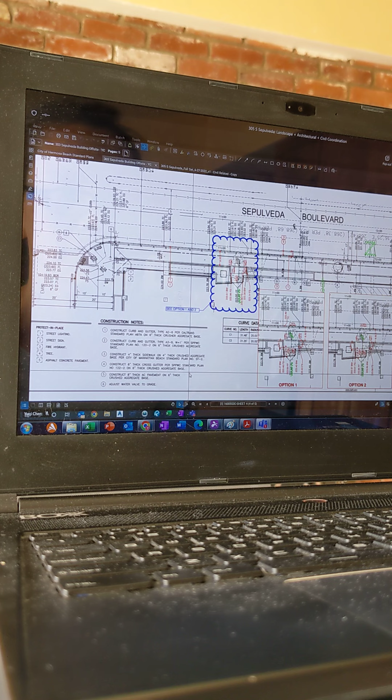So what Yuki is showing is the area off of Sepulveda, which is our main entrance. Previously, the sidewalk was sloping towards the curb, but everything from the property line was sloping towards the building, towards the door, and we had a trench drain. Maybe Yuki, you can show what the initial grading concept was and where we want to see if we can make a revision. Yeah.

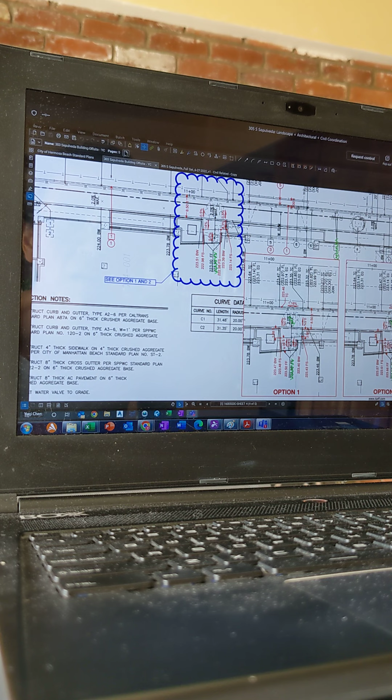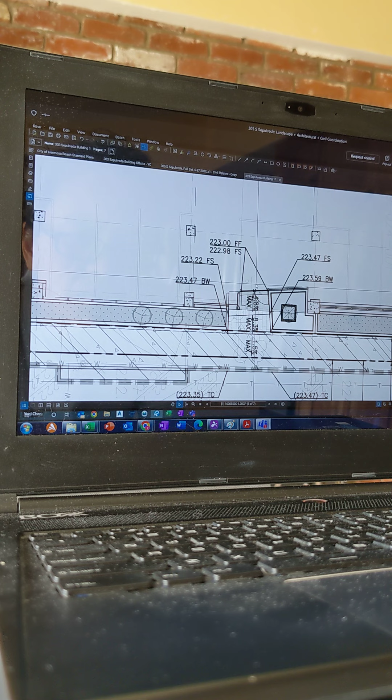So originally we are proposing to have the sidewalk and then with a ramp that goes to the trench drain, which is this one here, and then go into the building entrance, the 2%. And because the elevation is way lower than the street elevations, that has to go towards the building. But the issue is that there will probably be some drainage going to the building, which is not preferable.

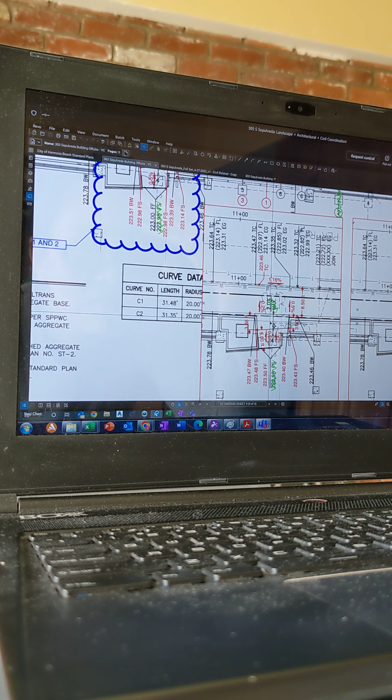Then we are proposing to have two options that can help to mitigate the issues by raising the building pad to allow the water to flow out to the street with a minimum slope. So here are option 1 and option 2. With option 1, where we are raising the building pad, the main entrance, about 6 inches, then we can have a very minimum slope to drain the water out of the building side and to the street.

And then option 2, if we raise it 8 inches, then we have more flexibility to meet the street requirements, which is the sidewalk can go over 1%. With everything going to be drained and caught here on the trench drain as well as going to the street. So these are the two options that we propose to help mitigate the drainage issues.

I'm not sure we can raise it at all based on the height limit. So if it's not the entire pad, Kara, could it just be a transition at the door like we have done on some of our other projects together? The reason here, I think it's option 2 that will be approved by the city and Caltrans, given they want a minimum of 1.5 to 1.8%. So for option 1, we'd have to fight harder on presenting our case.

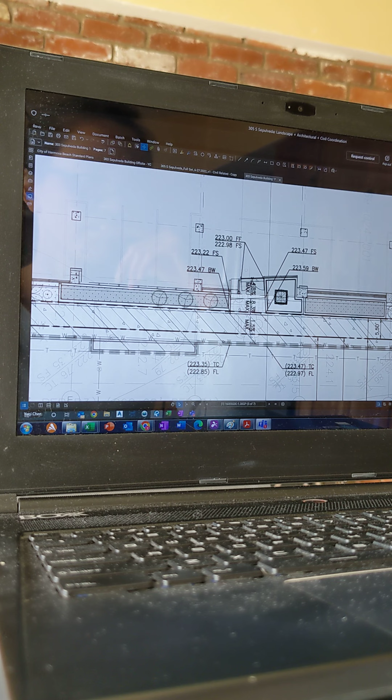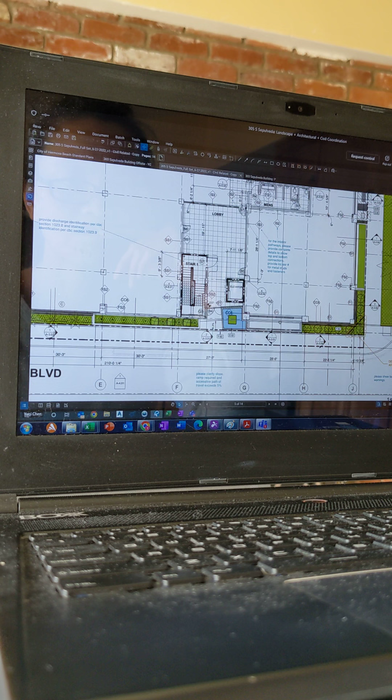I think the plans on the architectural, and Yuki, you have that right from the comments. Yeah. It's showing 223, and that has the 8.3%. And so that's the comment from the city as well: please clarify slope ramp required. And I see we have the elevator there. So could we catch up to the grade just at the edge of the elevator on the west side? What's the grid line? At the westerly edge of the elevator to grid line 2. You would probably need a flatter 2% slope as well, right, Karen?

Kate, do you have the model open by chance? I'm in the process of opening it to look at it. But I thought we had 2% at the door, 8.3%, which yes, still does not work with the required handrails and then the sidewalk. Yeah. And it looks like we're about 3 inches below our height limit currently. So we would be maxing it out to 8 inches, right? Because is it 223.67, Yuki, in option 2?

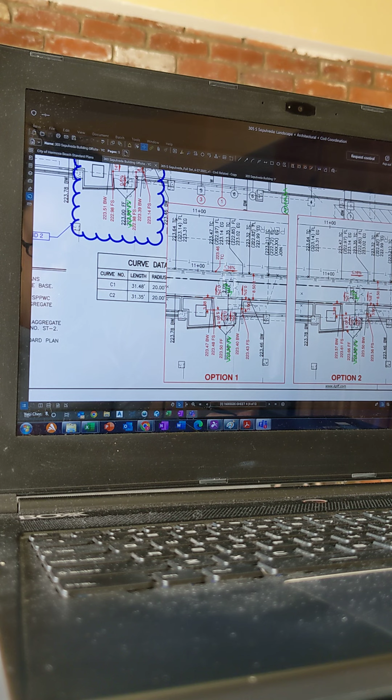Yuki, can we zoom into the south side on the alley? Because right now it looks like we have a 9.8% ramp from the property line to the wall. The loading you're talking about is in the alley, correct? Yeah, it's down farther on that plan.

So the alley drawings that you were looking at on Boundary Place? Yes, so that's, and I don't exactly remember what happened here. I think they want this loading, but someone, like a neighbor or someone, didn't want it. So what the city asked us to do is to wall it off, but make it so that if we do want to make it a legitimate loading zone in the future, they can demo that wall and it can be a truck turnaround or a loading zone. So that's why there is a wall there at the 223.

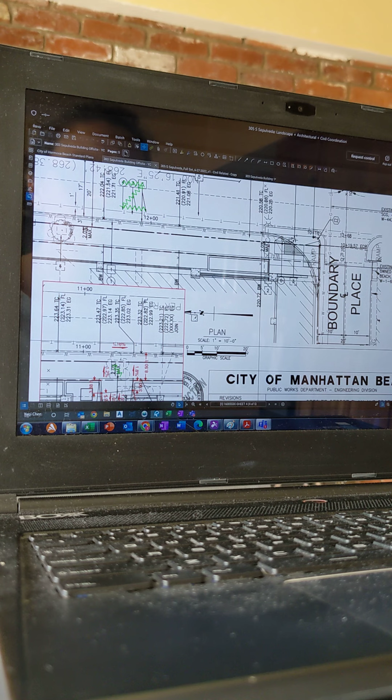Yeah, that's a 9.8% ramp. That's so random. 9.8%. Yuki, you looked into the grading in this area, right? Do you mind pulling that up? Maybe splitting the screen. And then other than those two areas, I don't think it will affect anything else, right? No, the other areas that we have, and we can look at it. So that's the loading. Yes, the elevation at the alley. Maybe even pulling up the survey would be helpful.

Well, it's that grid line 8 or that property line. Yeah. So we were making the adjustments at the property line, so maybe we should open up the survey, Yuki, here. I guess I'm also thinking about if this whole slab raises, does that raise those planters on the west yard? Like, does it raise the whole structural slab? We can look into that.

I believe there's another thing Tim mentioned to me just a couple of days ago. On the west side, we need to provide a fire access route. Is that right? And he indicated that was coming from a conversation with Bennett Design Group. So one of the correction items was to provide a fire access walk around. Okay. So not really a route per se. Okay. But Yanni, correct me if I'm wrong, but I believe it was a 3-foot wide walk around. That's right.

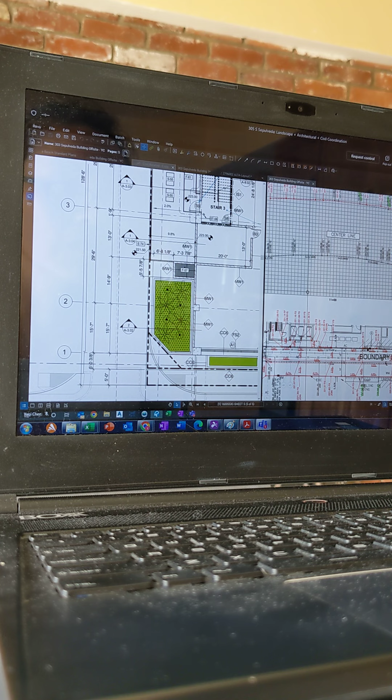And towards the north end of that, the existing grade looks like it really drops down. So from grade to top of wall, it looks like it's 8 or 9 feet. Are you looking at the western side? Yeah, the west side, at the north end of the west side, right by the transformer yard. I think that wall is like 8 or 9 feet. Could you go to the survey, Yuki? Maybe unsplit the screen.

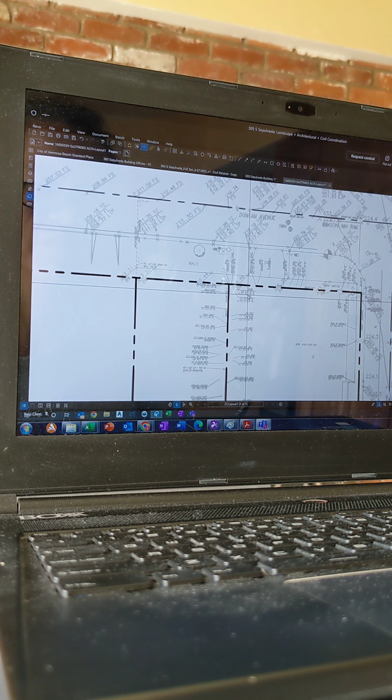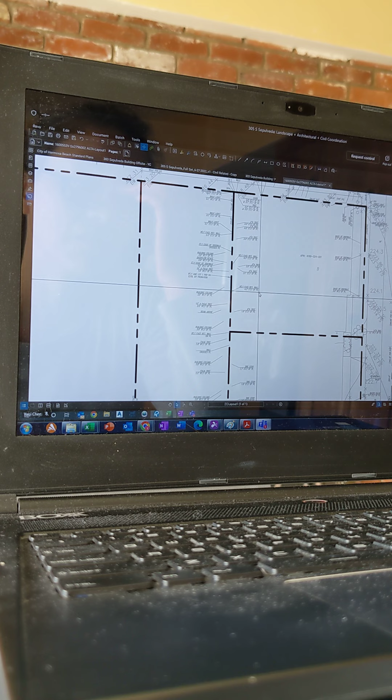That's the west side. That's the north. It's further. It's okay. Plan down. And I think over to the left more. So if you zoom out completely. This one doesn't have all that information. Yeah, so one of the things that we need is to get our survey team out to get the elevation along this path here. Requesting control.

Well, okay, do you have our set open? It looks like you might. Can you go to page 42 of our set? Open up the full plan check comment set.

Hold on, I'm doing that. Or I can share my screen. Would you prefer I do that? Sure. I just wanted to show you. This is all about the west side.

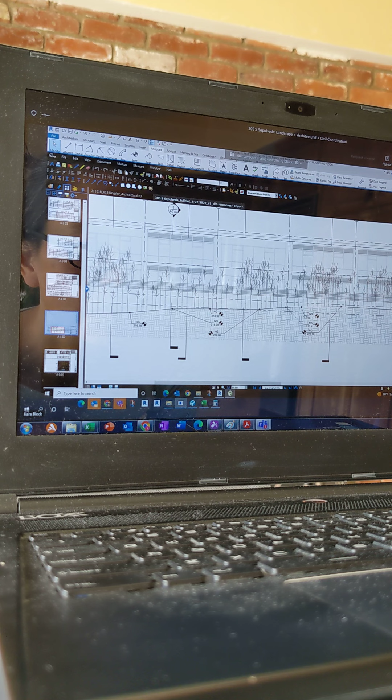West wall elevation, yeah. So we have this west wall elevation, and I'm not certain how we got to these. I was assuming it was that we worked out something with you guys for this natural grade. But I guess if you don't have that on your survey, I don't anymore. I'm not confident on how we got this.

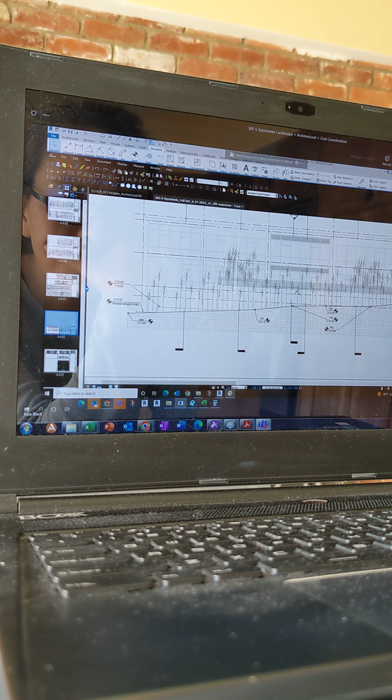Right now, this is the transformer pad area. I don't know if this is here, but then this is that westerly planter. So it's like really tall at this end. It gets less tall over at the south end. Let me see. I know we did the 3201. Not sure if they got any elevations at that time.

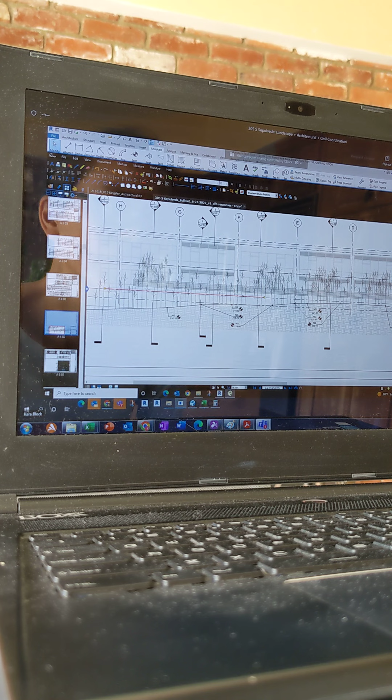Yeah, for some reason I thought you guys did do some there, but it was difficult because of all the vegetation. That said, the reason why I started even looking at this is because right now the floor to floor is 12 feet. And if we are talking about moving this up 6 to 8 inches, that will also potentially affect this planter back here. But what is this planter? I don't exactly know what that planter is anymore.

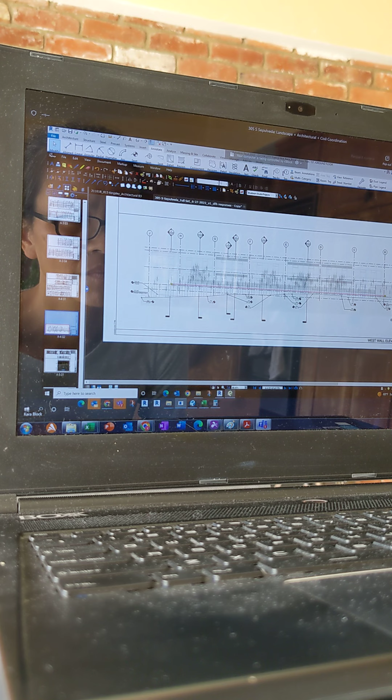So I guess we probably need to change it, right? Because do we have a use for Epic? And given the challenges that we experienced on 330, I'd rather not use them because if Mary's still there, she was not easy to work with. But I want to get the opinions of KPFF and Bennett Design on that one.

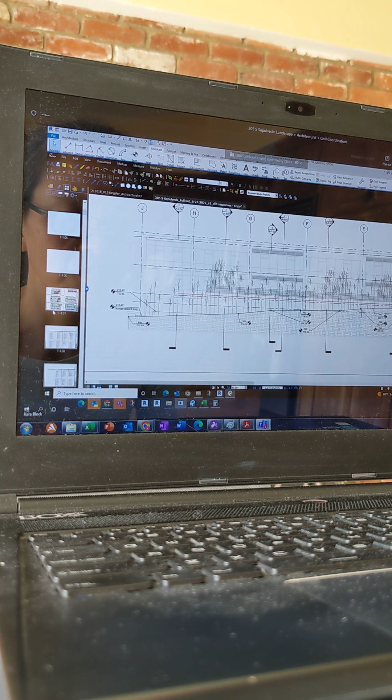But also on our end, we need to look to see if there's any height limit restrictions of things in the side yard. I hope not, because everything from this line down is in the garage level. So this is our electrical room and our fan room and stuff like that. So I don't think we can lower it at all. Lower what? This wall, this top of wall. But we are not looking to lower it, right? Well, no, but I wanted to make sure there's no height limit of walls in the side yards, because this is technically a side yard at this point, not building. Okay.

So from our perspective, it doesn't matter to us whether it's Epic or not, because we are changing the mechanism of the stormwater treatment system. We are utilizing a dry well, and what that western planter is counting towards is the green space in our calculations. But that is it. That's our perspective. So I'd leave it to Bennett Design Group on whether they want to repurpose that planter and use it as a normal planter space rather than using Epic equipment in it.

I think when we did our last round of plans, the assumption was that it was no longer an Epic planter, but we can revisit it again. Right now, we just have low grasses in there. The bamboo part, though, Kara, is taller, right? It's where the bamboo is. I think. Yeah, that bamboo is in natural grade. I don't know how deep, but there's a space. Looks like it's 1.5 feet between the wall of the building and the property line. So that's where the bamboo is going to be going in.

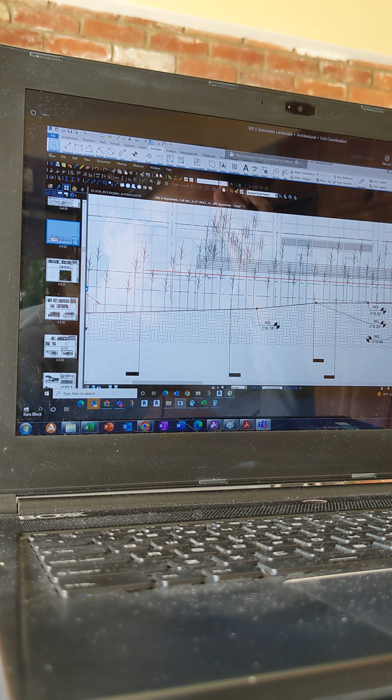Oh, so no. Sorry, not that skinny area next to the property line. I'm talking about within what used to be the Epic planting area, you had individual rectangular planters. Those are taller, right? That's more like top of wall, 48 inches above structural slab. It's taller. I don't know about 48 inches. Okay. So right now you can see them. They're right here. But that is taller. Okay. It is taller. I don't know the actual dimension.

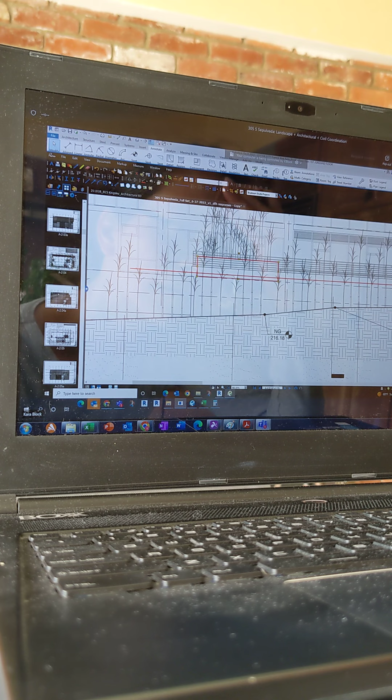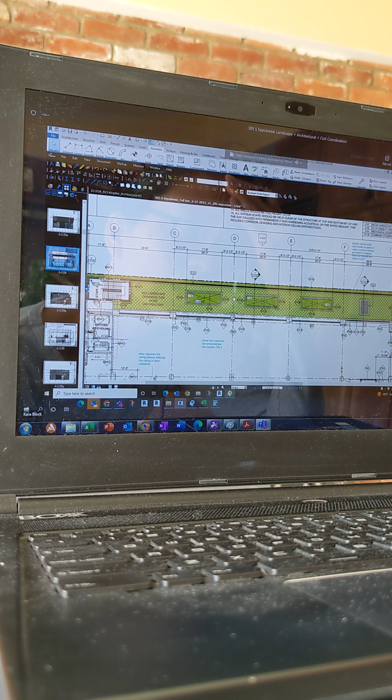So I guess for Yanni and Todd, it's up to you what you want to do with the rest of this planter and what you are able to plant. But now that it's not Epic, we will have to slope to drain, so we'll have to have a built-up topping slab, and that we will have to figure out together. Because it's going to get really shallow up here, and I'm assuming the drain will be somewhere here. So soil depth to be determined. We will have to look at that together. Because this is on top of the garage, right? Yes.

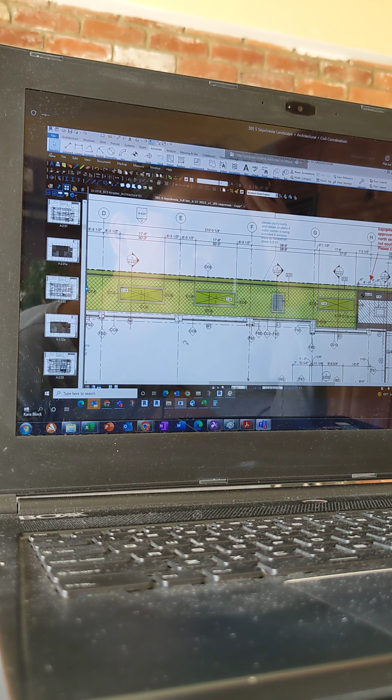So that's the other thing. I'm looking at this drain and this planter. I'm not sure it can happen here because you can't have any drains in this electrical room, but I believe they can be in any of these other rooms. So we should look at that too. That's, I guess, for Yanni and us.

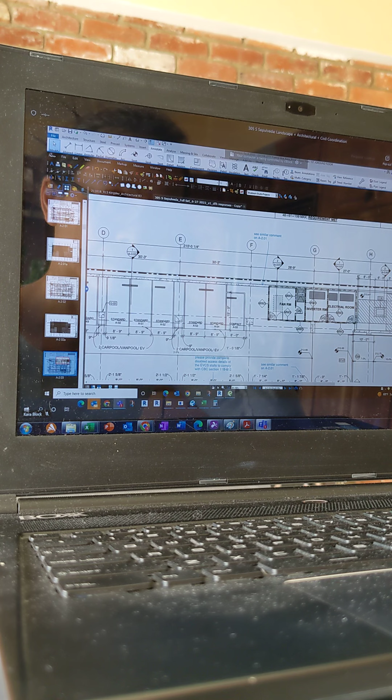It's good. So just looking at summarizing our coordination, the finished floor at the main entrance. I believe we have just the main entrance off of Sepulveda Boulevard that would be impacted, and then the loading on the south side. The stairs, elevation at the stairs is flexible, right? Because you'd be catching the grade at whatever you have at the alley.

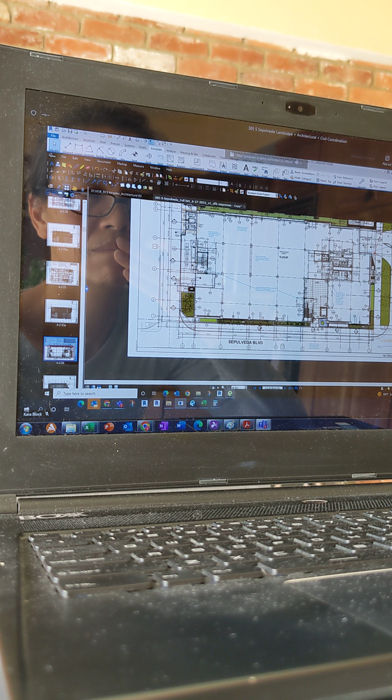Just west of grid line 3. Correct? Yeah, it's flexible because this has to extend all the way to here. Yep. So what you'd be concerned is the elevation at the loading dock where you have 223 listed there. That's going to be a bit of a challenge because our alley existing grade is 221.5, 221.7. We can look into regrading the alley. I understand we have to do the entire alley so we can see how much we can raise it.

But I'm seeing, what's the difference? It's about 14 feet that we have, or 13 feet from the wall to the property line. No, 17. The 17 is to the center line of the column. So, the dimension from the property line. Kate, do you have the model open? I'm just reading it from here on your drawings.

So you're looking for the property line to which wall? To the face of grid 3? The face of the loading wall. Yeah, basically, she wants to know this dimension here. Okay. 15 feet. Okay, so I'm assuming we cannot go more than 5% slope.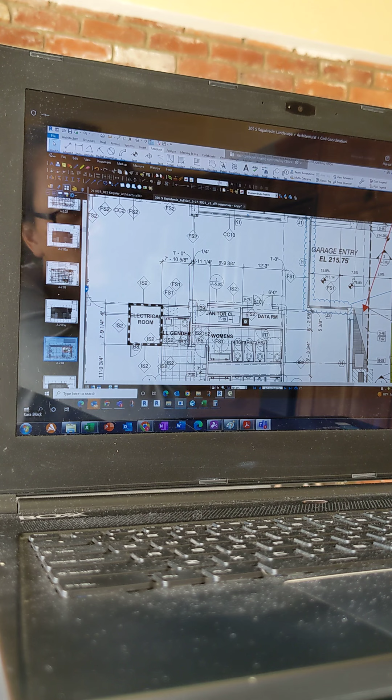Yeah, and I think basically for drive ramps, the maximum is 10%. Oh, actually, right, never mind. In Manhattan Beach, it's maximum 15%, up to 7.5% transition. Sorry, you can go. I mean, the rule there is, if you can keep it under 10%, you're good. But really, 20% is the maximum. You just have to get approval, and then you got to consider the differentials before and after, so that you don't bottom out cars, right?

Yeah, but for the loading, maybe. So you're saying for the loading area, we're considering it in the same manner as we would for a driveway, correct? Or is that, I don't really know. But I guess so. Okay. In theory, yes. Are you talking loading along the street or loading? Well, loading zone. Yeah, in the EIR process, we had to show turn radiuses of trucks backing into here. Right. So first of all, the city, and I don't remember why, made us close this off. But the intent is if they ever make us open it, that a large truck would be backing in and out of here.

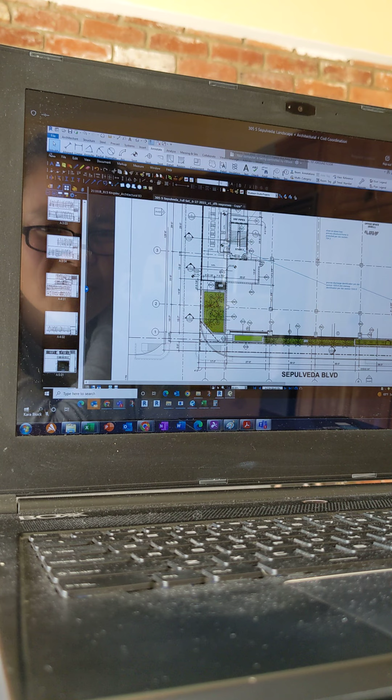Yeah, this back of house stuff is, as long as there's no, the best I think would be if you can keep it at 6%. That would do it. I'm looking at this elevation on A3.04, section GG. The wall is quite high there. That's the wall, right, with the driveway between. Yeah. So trucks are backing in, but how far are they going in? They're not going into the space, correct?

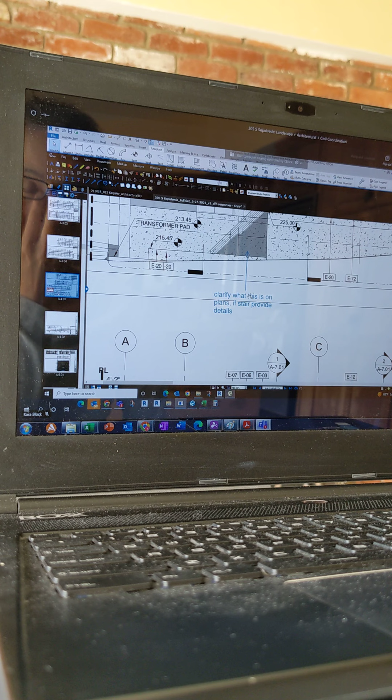To be honest, I don't know why it's modeled like it is. I thought that the city's code mandates that it has this loading zone, but in the EIR process or in one of the entitlement hearings, neighbors were up in arms about trucks coming down Boundary, and they did not want that to happen. So they made us wall it off, but it looks like, yeah, we have it all, and then it's just open air.

Strange. I'll have to ask David Hibbert if he remembers what happened here. So yeah, it does look like it's open air.

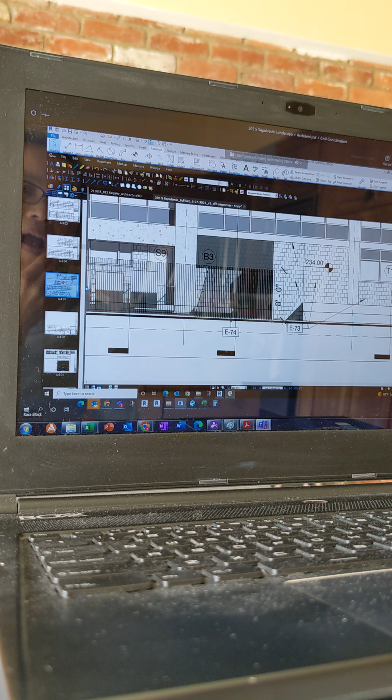So it's kind of a permanent wall or just a... Yeah, they don't really want it used, but I believe they didn't want us to use it as like floor area. Okay. Section. So I don't remember, but it's walled off. It's not going to be used, but we have to design it as if it was going to be used as a loading area. So then does it matter, the elevation for 223?

And that wall would be like a retaining, the alley would be lower. So do you remember what section? 3.04, yeah, that one. The one below. Yeah, I think it does matter in the event that the city does want us to take down this wall and have it open. Okay, got it. But as I recall, at this moment, they don't need to take down that.

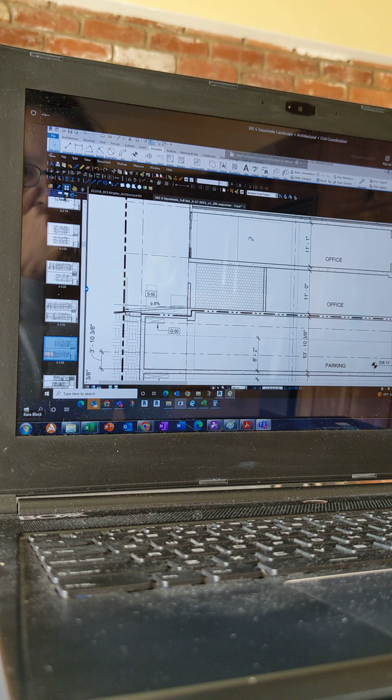So on our end, we can see how much we can maximize the alley grading and make up the differential, because the alley is in the range of 221 and a half. And if we're raising our finished floor to 223.67, if we end up going that way, then we have almost 2 feet of differential. So we'll have to see what we can do. And I understand that zone between the property line and grid line B, we can maximize it to 10%, right? I think that's what we're going to look at.

The only reason I'm pausing is because our driveway ramp has a 7.5% transition to the 15% max. That's why I don't know about the 10%. Oh, so I think that 7.5% max is being driven by your 15%. We do have driveway transition profiles that we can see. Yuki, do you remember downloading that from the City of Manhattan Beach standards? Drive profile. Mm-hmm. Yeah, we can look that up.

Yeah, because I believe at one point we did have this designed as a 10%, 20%, 10%, and that was a correction item back a few years ago where they said no, 15% max. But anyways, that's the only reason why I'm giving. So if yours is 15% max, then the half is kind of the thumb rule. So that's why you have 7.5%. I see. And I think you can do a 2 to 10%, and there's another angle of deflection that is allowable. So I think we'd be okay. But yeah, we'll back it up.

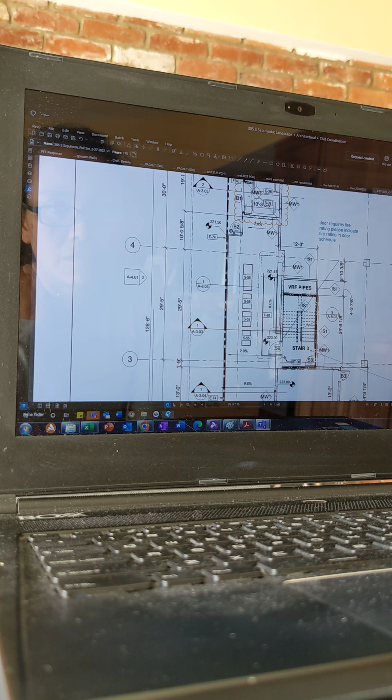Okay. So when we do our grading, we'll make sure that this circulation that you're showing with the ramp works. Yep. Okay. And this stair doesn't matter, right, because it's flexible. Yeah, hopefully we don't need to add too many more risers. I guess we could. We don't have an elevation here. Looks like you are accounting for 220.57.

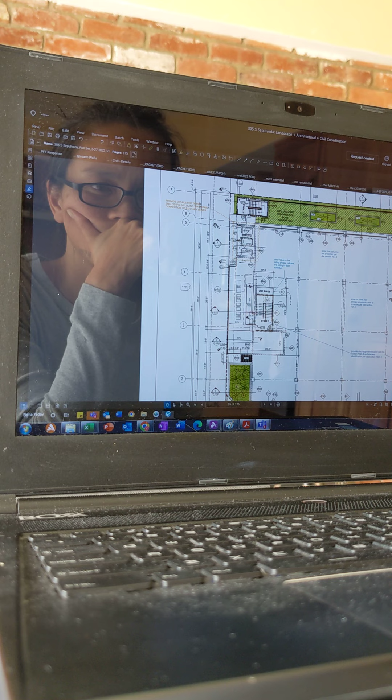So if you can send that over, if there's a preferred elevation, or we can mark it up and send it to you based on our alley grading. Maybe that would be the way to go. Do you have to regrade the whole entire alley? We have to repave the alley, but because of some of these grading here, we were making adjustments along the property line. We don't have to regrade it, but we are repaving it. So in theory, the one at the west property line will probably stay. Yeah, because that's a joint condition, correct.

I'm looking at this, the refuse recycling, is that open to sky or closed? I believe it needs to have a roof on it. Okay, so plumbing will take care of the utilities. We're gonna schedule a separate call with Clumac once we get their drawings as well for coordination, hopefully next week. I believe that is it. One of the things that's coming up is this fountain. Again, that would need a sewer connection as well. I see that's coming up on 2901 PCH as a coordination item.

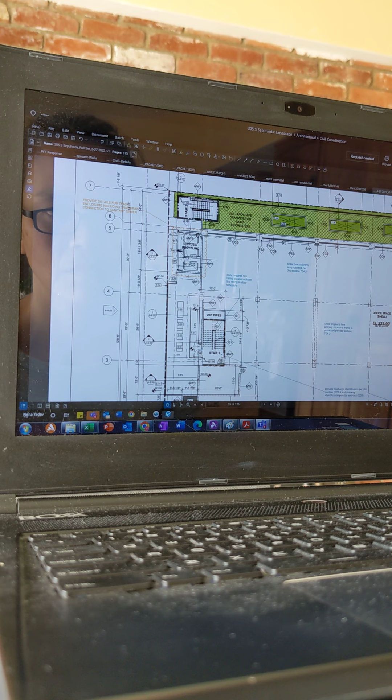Going back to the refuse, right now we don't show a roof on it, we show it open to the sky. No, but isn't that one of the comments that it has to be enclosed? Oh, I was just working on it yesterday and I didn't notice that. Oh, okay. Well then it might be open to the sky. Okay, we'll have to coordinate that with plumbing.

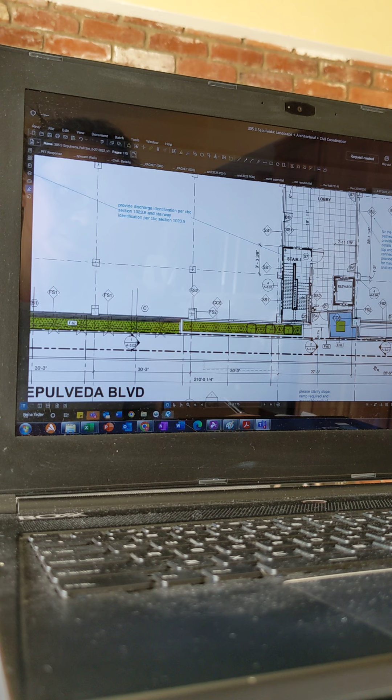Before we go too far on this, I just wanted to bring up the point that the floor to underside of concrete deck right now is 10'9.5". It'll be about 10'3", and then we have the drop soffit in the lobby. It's 10'9" now, from the topping slab to the underside of the second floor deck is 10'9.5". Right, but if they want to raise the slab, then it will change. They're raising the ground floor up 6 inches and some change, so it'll be 10'3".

Back to the recycling area, I think it said recycling, that's clear to the sky. Yes, it is. So how's that gonna drain? Is that gonna drain by a catch basin in there, or is it just gonna run out of there? It's running out of there, and that's what we have right now. We don't show a drain right now, so we need to coordinate that. I'm unsure if it can just flow out into the alley. Yeah, different cities have different rules on that. Commonly, if it's clear to the sky, it can, and if it's covered, it can't.

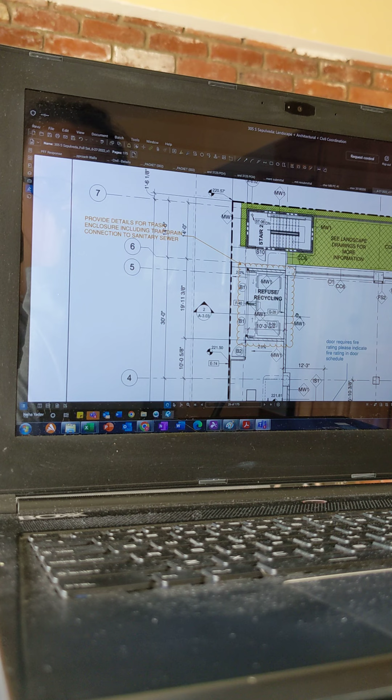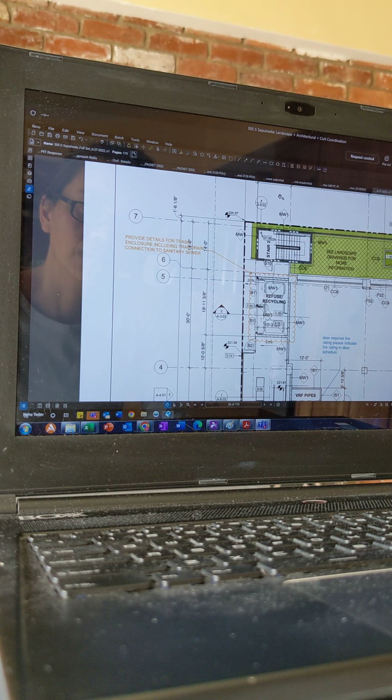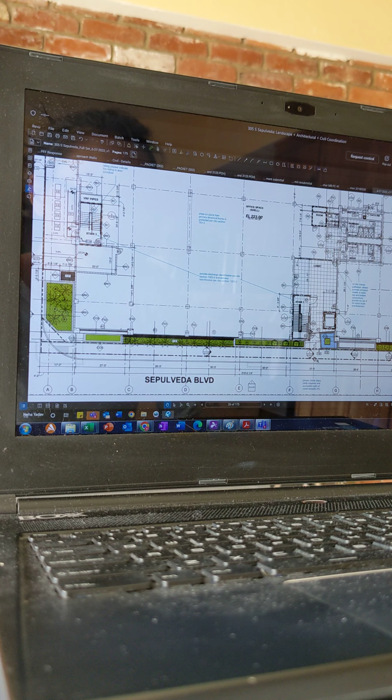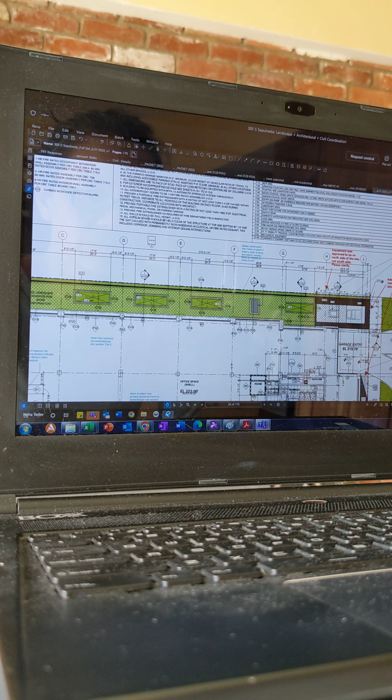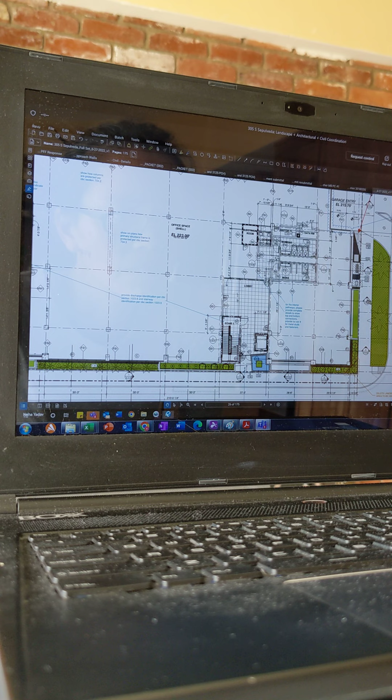So you're gonna look into raising the finished floor? Yeah, I brought it up because that is pretty tight for CM. Okay. And we're gonna look into the utilities as well, because we have this domestic water, fire water, and I'm unsure where we are placing the irrigation backflow prevention, so we'll have to discuss that as well. One of the things that has been coming a bit late is the irrigation requirements for all these planters, so Yanni, if you can look into that and get us the information from your irrigation consultant. Sure.

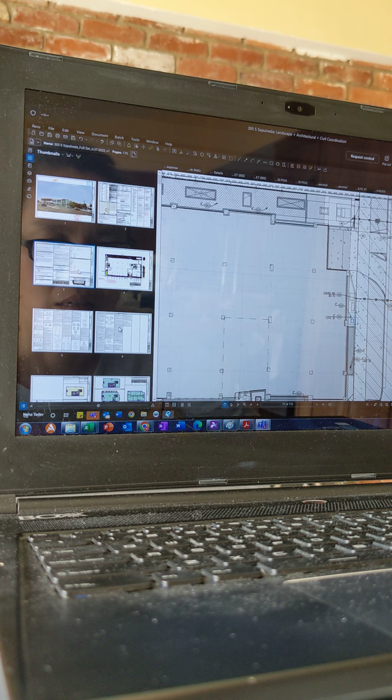He shows a dedicated meter in the vicinity of, I don't have share screen, sort of where your hand is. He schematically shows it roughly around there and a backflow preventer there. Okay, so we'll need to show that in the architectural drawings because it's not reflected, and we'll have to move all our utilities, so that's another item we need to coordinate. What sheet is yours, Yanni? Hang on, in that big document, I'm not quite sure. Neha, is this the same water purveyor as the other project? No, this is City of Manhattan Beach. All right, so they're probably going to want an independent meter. Okay.

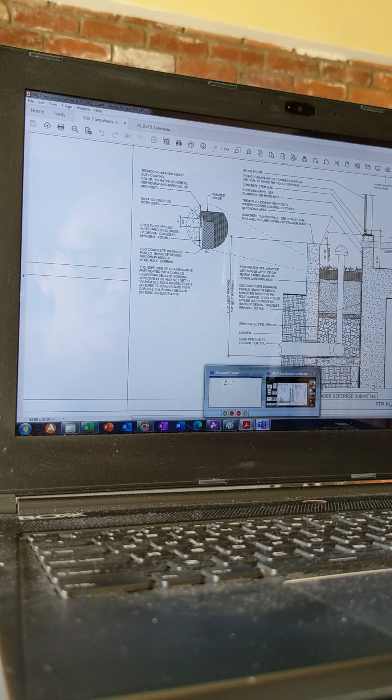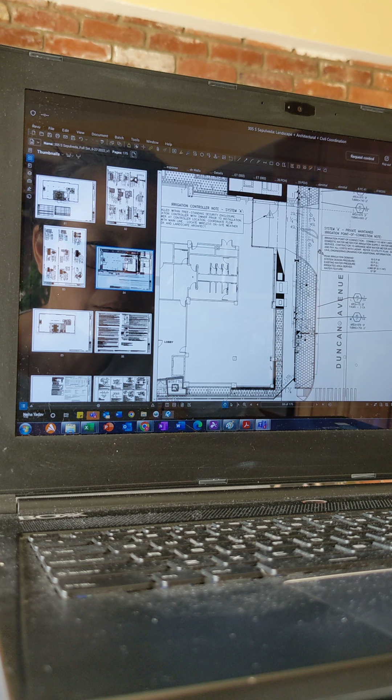Sorry, I'm trying to see if I can find it in that big document. I've got it somewhere. Yeah, I have pulled up your drawings here. Oh, did you find it? Okay, so 84 of 175. There you go. You're saying irrigation point of connection, connect to new 1-inch domestic water meter for irrigation supply. Okay, we'll need to show this as well. And I think this yin yang square is the backflow preventer. Can you get us the model? I'm gonna look for it here.

Don't see the detail for it or the spec. They may think not, they will specify the backflow preventer. I think there is a detail a few pages down. Oh, there you go. Yeah, I see. Wilkins. And that's 1 inch. Can you send us the cut sheet for it, Yanni? Sure. Thank you. They want reduced pressure too.

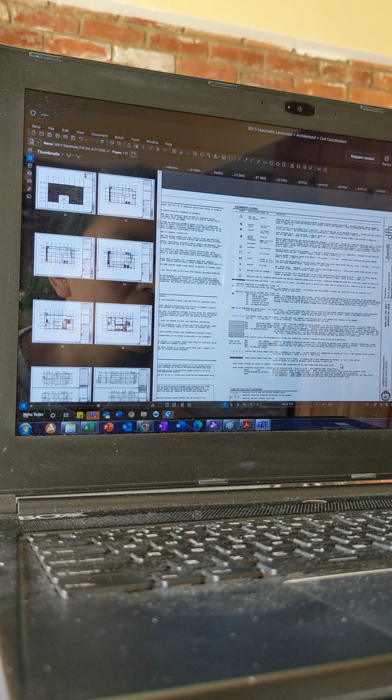Anything else, Yanni, at this point? Along Sepulveda, at one time we had flow-through planters, but we no longer do. Is that correct? Technically, we are not looking for flow-through planters. The planters are great because we're adding towards the stormwater calculations, but we don't need those to be flow-through. We are taking everything down to the basement.

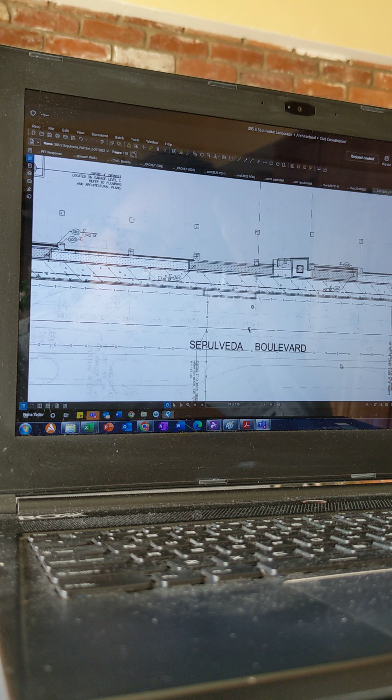Okay, so do those planters still have concrete bottoms? What were flow-through planters? I'm just trying to make sure we have enough depth in all of these. I don't think I have section information for the planters along Sepulveda. I think given the coordination that we had to do for 2901 with the depth and making sure they're designed, I would like to take care of it now.

So what kind of planting would you be putting in? Well, we do show plantings. I should probably review one more time with Todd before sending to you, but we do have some palms. Hang on a minute. I think we have some date palms. Just a second, I've got the wrong plan. Yeah, so given that they were deep, we needed over 4 feet. We would need to look at shoring and all of that for this.

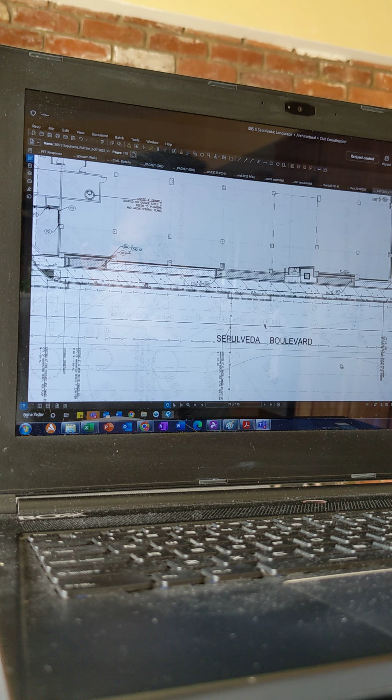And also, I guess, based on the concern of the canopy, distancing, that might be some. This is only like a 3 foot wide planter, so the canopy would definitely be hitting the building. So Yanni, if you can look into the planters, because I would like to get our structural on it and not hustle in the CA. I think that would be great. Even the one on Duncan Avenue, the planter that we need.

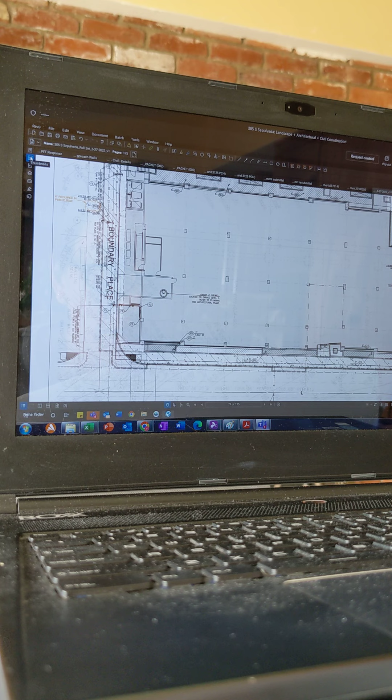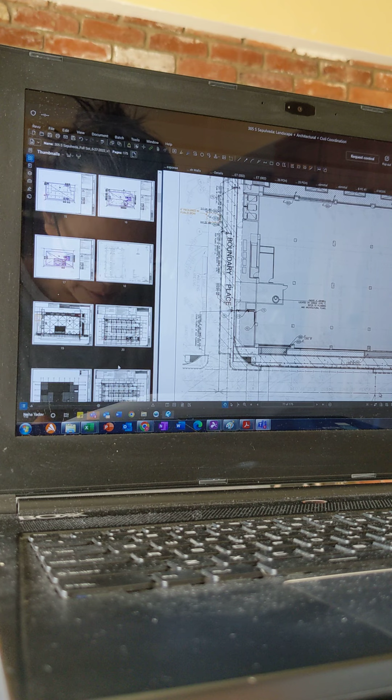I could barely hear Kara. Kara, are you saying there's like an overhang or something on the front elevation that we need to worry about for the canopy? No, but these planters are only what, 3 feet wide. So if the date palm canopy is over 3 feet, which I think it is, it's too close to the building. Yeah, exactly. We'll revisit it. Sorry, I misspoke. It's not a date palm, but a king palm. But still, we should take a look to see if it's too close. Right, because if it's going to be just smashing against the storefront, that's probably not what is desired. Not ideal.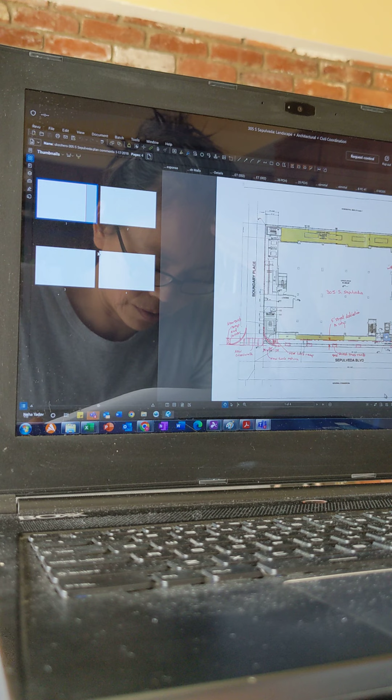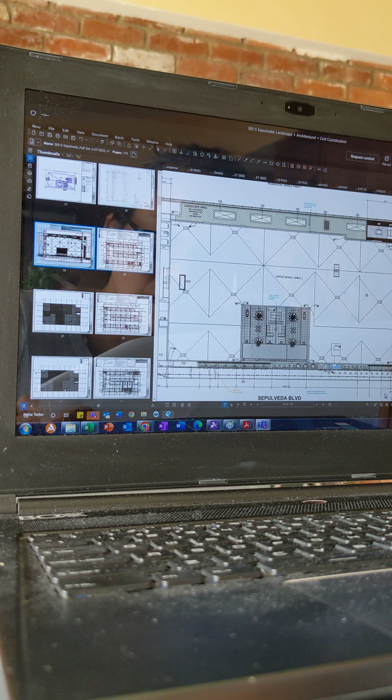I was searching through the drawings. The only section I had was through what used to be a flow-through planter, but for the others, I'm not certain if there is a bottom or not to them. So I think I just need some direction as to where I look for sections for these. Sections for these planters? Yeah. We haven't, but let me see. I don't know if we have it. It would be A3.01, correct? Yeah, 3.01.

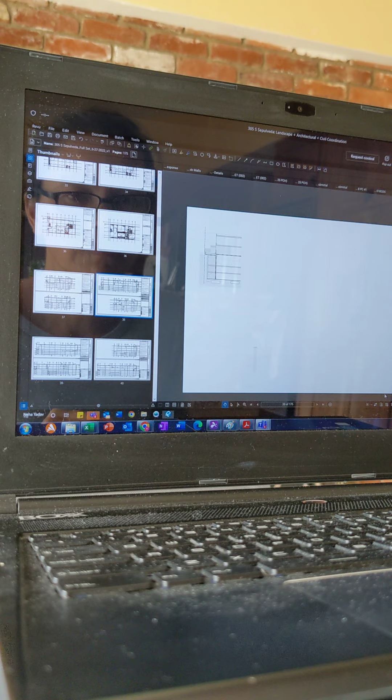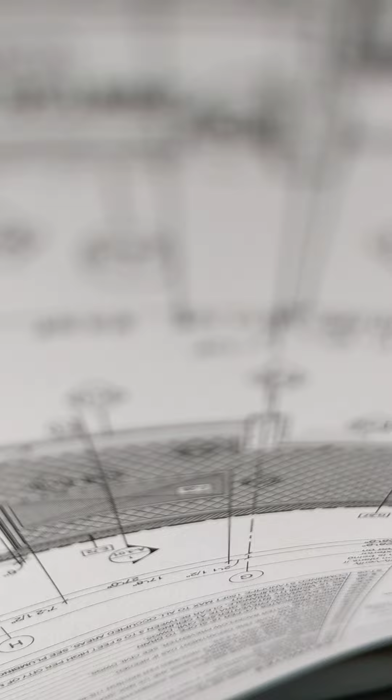A lot more. Probably 41. Okay. These sections first. Oh yeah. Looks like it's west. Oh, sorry, that's the west. So I believe that's the entry. This as well? That's the west projection. So it looks like these are mostly over grade, I'll say over the sidewalk, natural grade in quotations. So would we have a concrete bottom then, or it would be at grade?

There shouldn't be any reason to do concrete at the bottom. Right, I think it's going to be up to whatever your footings are. Okay, so we can start. So Yanni, maybe the next meeting would be looking at the off-site coordination. I'm not seeing any trees or landscaping requirements for Sepulveda, but there is for Boundary Place.

So we can schedule a call for that. And then one thing that I do want to go over is the dedication requirements that Eric Z had put out. Like it's a 5 feet street dedication to the city.

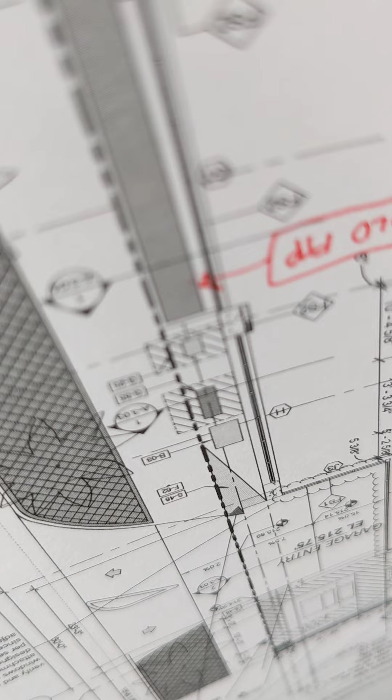Oh, he did show tree wells. My bad. Yeah, but you know, I remember we had those tree wells in there and then we took them out and I don't remember why. I don't know if it's the Caltrans thing or a utility thing. I think Justine figured out that there were utilities, there's a water line or something, and there was no room. Yeah, it's a utility line. There is the water line. Okay. So yeah, he marked it and then you guys found that out and then I think he said, okay, fine, we don't need.

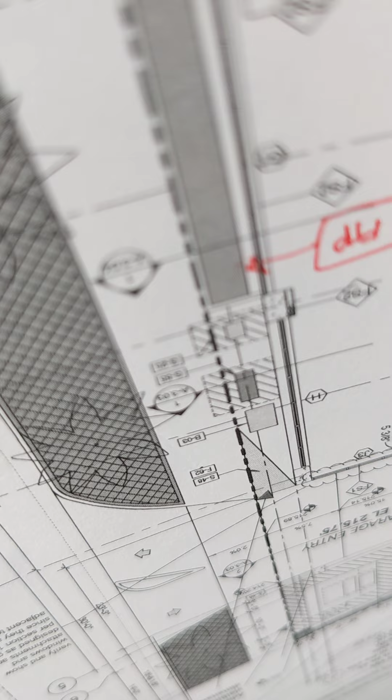Sorry, so on Sepulveda, those planters along Sepulveda, it sounds like there are not concrete bottoms in those planters, is that what I heard? That's what I heard, but Kara said it also depends on the foundation, if it's going to be turned. Because are you allowed to put your wall footing into the dedication? No. Yeah. So then it does need to be turned in. Yeah. And it's probably going to be at least 3. Yeah, so it's going to end up serving as a concrete bottom. But if it touches the building, wouldn't Fred have to design it as a cantilevered slab?

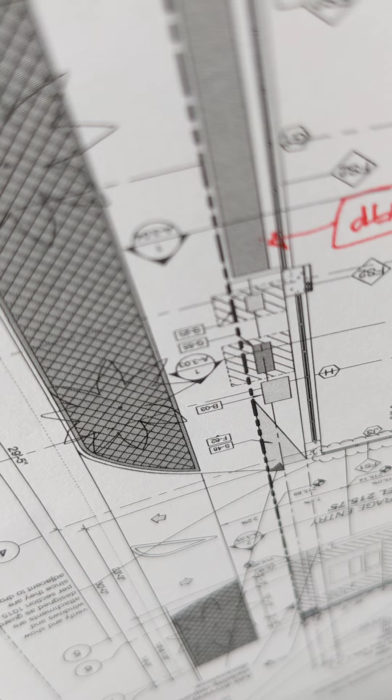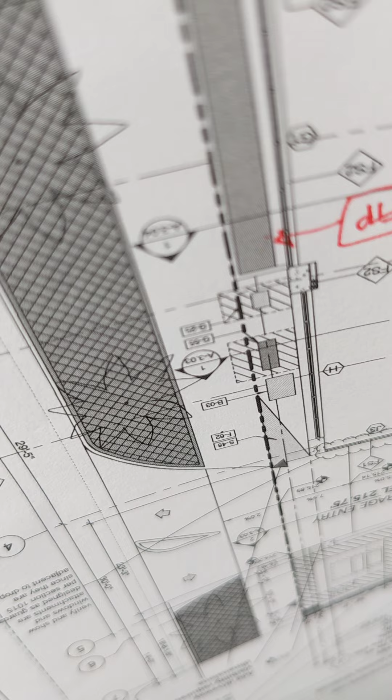Or no? Yeah, I'll reach out to Will and connect, but how much are you thinking for these? They will still be above grade, and how much below grade? Yanni, what would you need, like 4 feet? I'd have to ask Todd, but I'll get back to you on all of them along there. Okay, so we'll need that to give some kind of parameters. We'll have to look at it from a structural perspective then. And I think there is a height limit. Again, our office will have to check that out. I think there is a height limit of walls in the front yard. Okay.

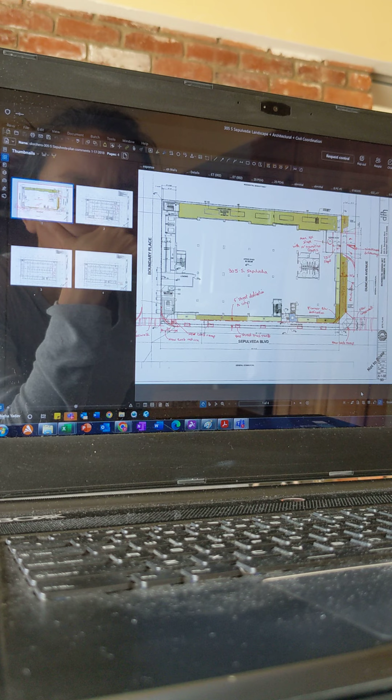Okay. So there are a few things for us to research and get back to, but yeah, you can see there's the dedication, there's the corner cut dedication. We need to circle back with Caltrans, given that they were going to do these ADA improvements along Sepulveda. So maybe tentatively we can look at meeting up on Wednesday with some of the responses. Does that sound like a plan? Yanni? Sure. Yeah. Okay.

And would Wednesday be okay to circle back, Kara and Kate? Depends on the time. We're usually pretty booked. Oh, yeah. Right, I can't do Wednesday either because I'm pretty booked with the CA stuff for the others, Skechers. Is Tuesday too early? I think I could do Thursday morning at 9. I can see what I can do and get back to you. Yeah, Thursday morning might work for us because we'll be on the road and we can do double duty. Okay, I'll put it on.

The goal of next week's meeting? Circling back, are we okay to raise our finished floor? I also would want to go over with Yanni the off-site improvements. Get that coordination going. We can look at the alley grading and whether it's working for the loading dock. We could do it Thursday afternoon, later. If we did it Thursday morning, if we end up going over to the site on Thursday morning, I can call in from my car.